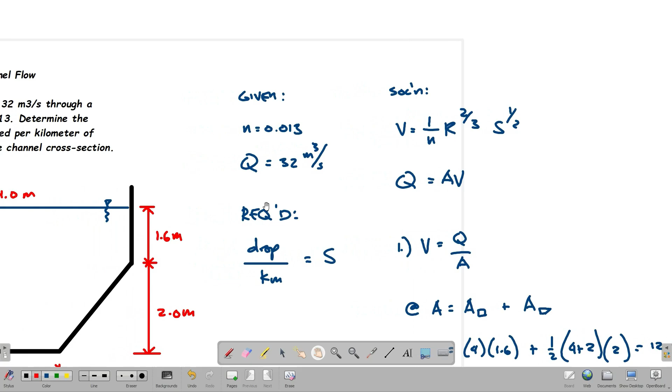So that's essentially the slope. Drop per kilometer, so slope na yan. So ito yung mga gagamitin natin na equations. First, kasi Manning's yung binigay na roughness coefficient, Manning's din yung equation na gagamitin natin. For velocity, we have V = 1/n R^(2/3) S^(1/2). So this is for SI system, kasi naka-meters yung mga units natin. And then you have the equation for flow rate, that's cross-sectional area times V, or Q = AV. Since given yung Q natin, tapos meron naman tayong dimensions dito sa figure, makukuha natin si velocity as Q over A.

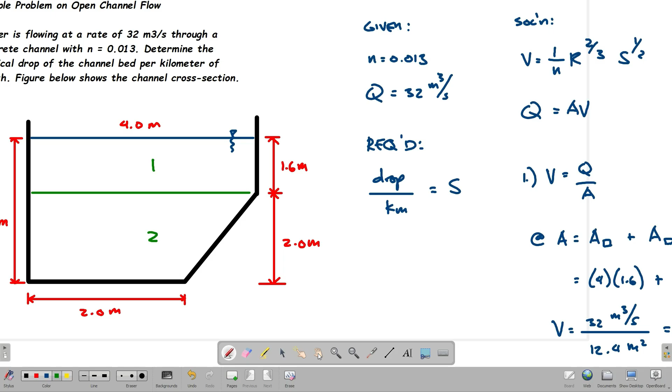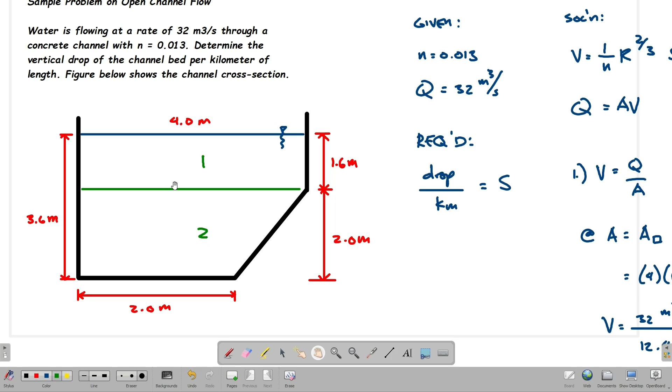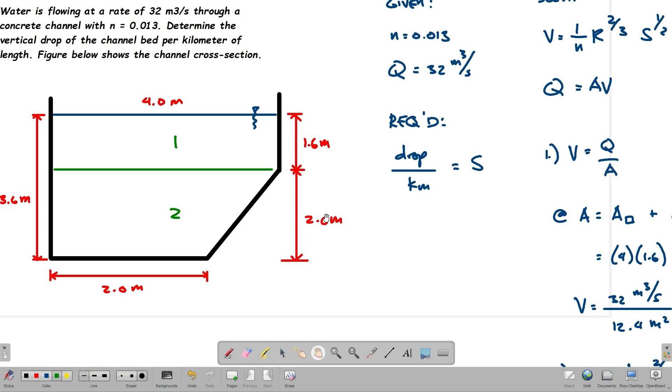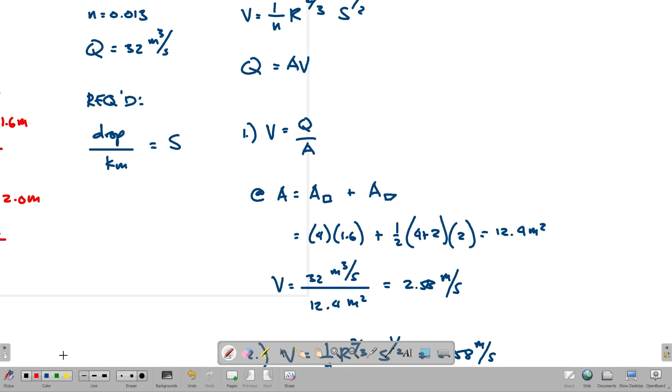Para sa rectangle natin, that's 4 times 1.6. Tapos dito naman, trapezoid, that's 1/2 times base 1 plus base 2 times the height. So, we have 4 times 1.6, tapos base 1 is 4, base 2 is 2.0, tapos yung height natin is 2.0. So, 1/2 (4 plus 2) times 2. So, yung sagot natin dyan is 12.4 square meter. Double check lang natin. Magkakancel yung dalawang 2, magiging 6 lang yan. So, 4 times 1.6 plus 6, that's 12.4. Tama naman. Confirm naman yung area natin.

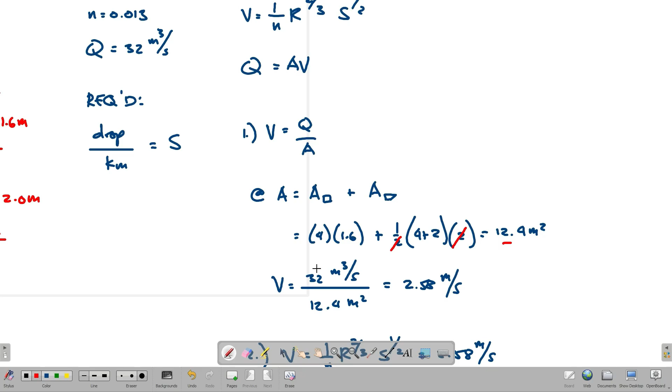So, para makuha natin si velocity, divide natin si Q sa area. So that's 32 divided by 12.4. That's 2.58 meter per second. So ito yung velocity natin. Since meron tayong value ng velocity, pwede na natin siyang i-substitute sa equation natin. So that's 1/n R^(2/3) S^(1/2) equals 2.58 meter per second. So pinapahanap sa atin dito again is S.

So algebra lang. Ang equation natin for S is magiging ganito. Ililipat natin si n sa kabila, so nandito na siya sa numerator. Tapos, bababa natin si R^(2/3). Yung R natin is just hydraulic radius. That's equivalent to the ratio of the wetted cross-section and the wetted perimeter. So, meron na tayong value ng area, that's 12.4. So perimeter naman, i-add lang natin yung mga sides ng channel.

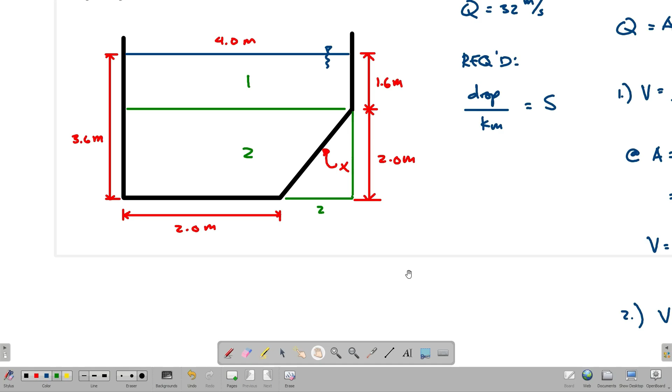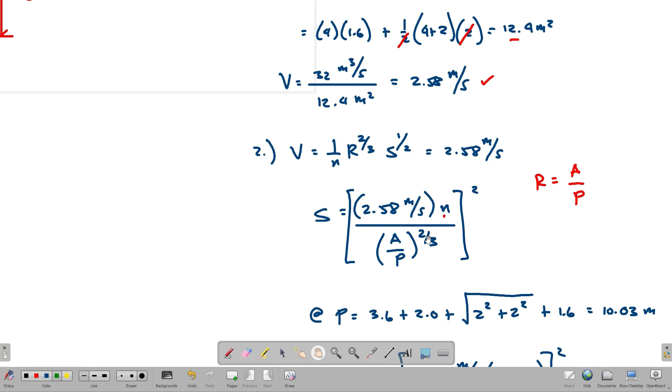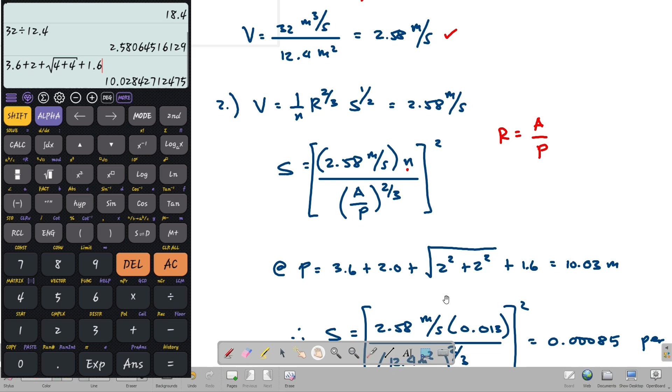So, perimeter is just 3.6 plus 2, tapos ito yung inclined dimension, square root of 2 squared plus 2 squared, Pythagorean theorem lang yan. And then, we have 1.6 dun sa pinakataas na dimension. So, yung sagot dyan is 10.03. I-confirm lang natin. So, that's 3.6 plus 2 plus square root of 4 plus 4, plus 1.6. That's 10.028 or 10.03. Round off natin to 2 decimal places. So, meron na tayo ng lahat ng variables. Pwede na natin i-solve si S.

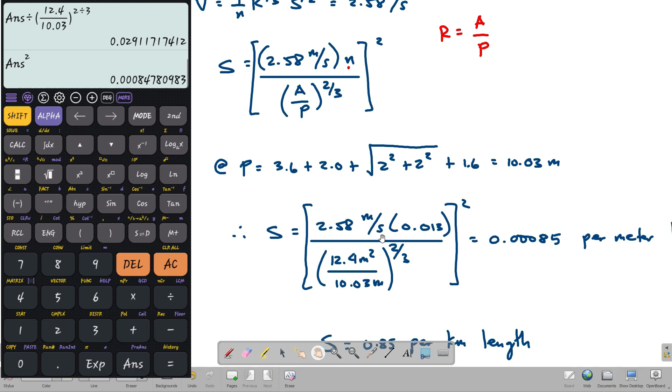So, we have 2.58 times 0.013 divided by 12.4 over 10.03, raised to 2/3, and then square yung sagot. So that's 0.000847 or 0.00085, pero alalahanin natin na naka-meter lahat ng units natin dito. So therefore, 0.00085 is yung drop niya per meter. Pero yung kailangan natin dito is per kilometer, multiply lang natin siya ng 1,000. So, magiging 0.85 na siya per kilometer na length.

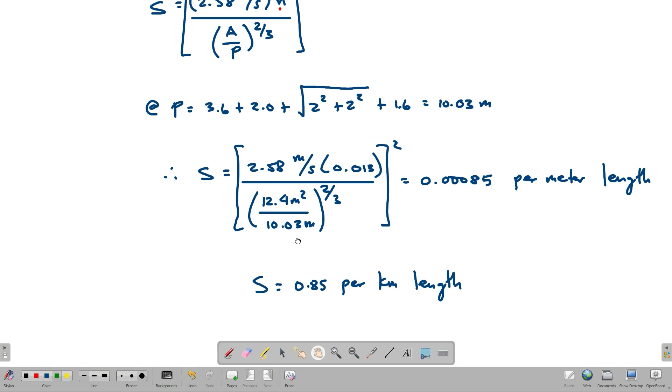So, I think ito na yun para sa sample problem na to. Application lang siya ng Manning's equation in open channel flow. Madali lang siya. Kailangan lang i-analyze yung figure natin, tapos yung mga given naman, substitute lang. Medyo straightforward lang siya na sample problem.